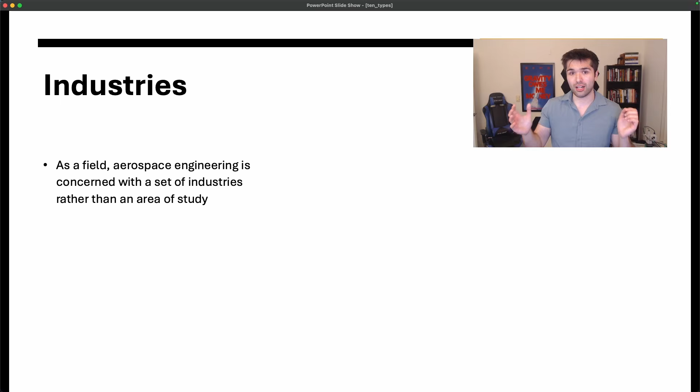So let's jump into the different industries, just to enumerate them all. As a field, aerospace engineering is concerned with a set of industries rather than an area of study. In my experience, and something I heard from my professors pretty early on, aerospace is unique from all the other majors with a couple of exceptions. There are a few engineering majors that don't really have a core knowledge base that everything links back to. Rather, they focus on an industry and then apply fundamentals or entry-level concepts of lots of different knowledge bases to those industries. Aerospace is the prototypical example of that.

So, an obvious one is aeronautics - aircraft, boats. Boats is a big one people don't think about, because boats moving through water is moving through a fluid, aerodynamics, etc. But aeronautics is a huge industry, of course.

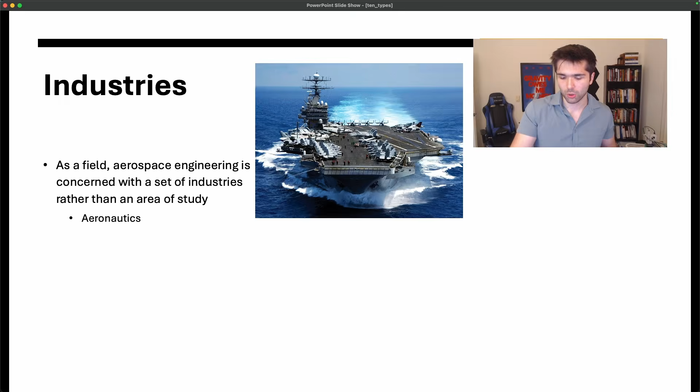Astronautics - satellites, rockets, just like aerospace, that's the space side, obviously an industry unto itself. Aviation - instead of fighter jets and aircraft carriers, just commercial aviation: large passenger jets, cargo jets, large commercial aviation, that's an industry unto itself. And then, of course, no surprise, defense - working on missile systems, drone systems, other types of weapons and munitions, etc.

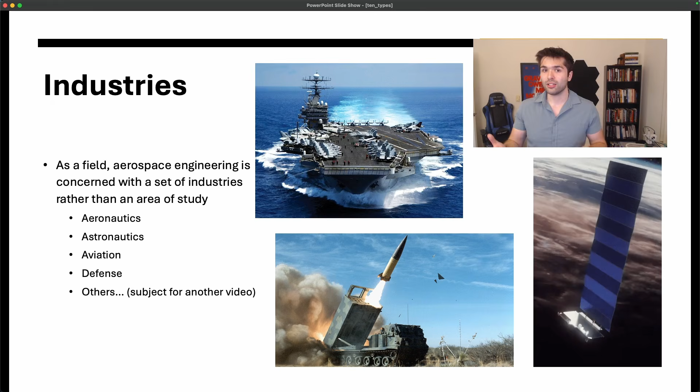So there are lots of different industries in which aerospace engineering can be applied, and these are the ones that come to people's mind, but in my opinion, there are lots of other ones that people don't actually think about that aerospace engineering can be applied to. That's a subject for another video, but overall, when you think aerospace engineering degrees and the kinds of jobs and industries in which people get those jobs, these are the different buckets of industries. I'll go into more detail about it in another video.

Okay, now let's talk about the real reason we're here: the different types of jobs that aerospace engineers can have. So you're starting an aerospace engineering degree. Once you get past some of those gen eds, you're starting to sample different bits and pieces, the different knowledge bases, and you're starting to think about what you want to specialize in.

So the first broad bucket I want to dump people into is what I'm calling dynamicists. Apparently autocorrect says dynamicist isn't a word, but I've heard it used about 10,000 times, so I'm pretty sure it is, but feel free to correct me. Anyway, dynamicists are people concerned with the motion of, or external forces on, a body or a system. Effectively, we're moving stuff according to some laws of physics.

That can be projectile motion, so we launch something that obeys laws of gravity, stuff like that. Rotational motion, so maybe some satellite is spinning or slewing to point at different things. Fluid motion, like through an engine or over a wing, like an airfoil. These are all people focused on effectively physics. These are very important competencies for different types of vehicles, like the way a rocket moves is different from how a drone moves, which is different from how an aircraft moves. Motion is a big deal, and there's lots of people whose job it is to really understand these laws of physics and how they're used in the real world.

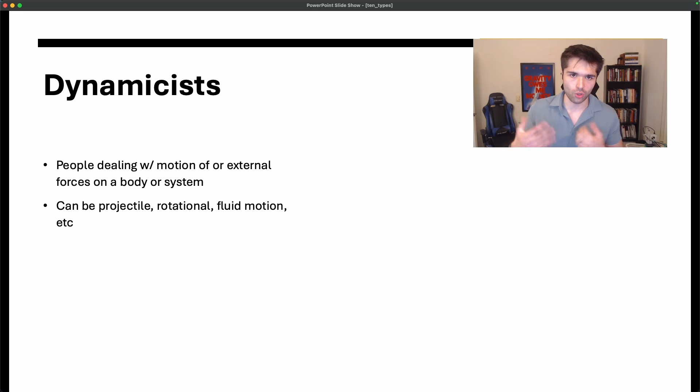So what are some examples? A classic one is aerodynamicists, people concerned with wing design or control surfaces like flaps and rudders, calculating the drag a body might experience and different ways of mitigating that drag. Or maybe, if you're working on something like an F1 car, using that drag to your advantage through stuff like downforce. People concerned with fluid motion, most of the time that's air as far as aerodynamics is concerned, but also maybe you want a boat to require less energy to cross a certain distance, so you need a sleeker hull, less surface friction so the water parts around you more easily. That would be fluid dynamics, but you get the idea.

Now beyond that, let's say you get high enough that air isn't a problem anymore: astrodynamics. Now we're concerned with orbital mechanics, like the two-body problem, where you're just concerned with a satellite orbiting the Earth. You could have a three-body problem, or maybe some crazy lunar transfer, trying to explore the moon or Mars or something else. So that's at the macro level. There's also the micro level, orbital mechanics in terms of relative navigation around other satellites or around a point on the Earth, stuff like that.

And then, kind of getting back to that rotational piece, the orientation at which a satellite is pointed, or the slews between those different orientations, is really important to its operation, for stuff like collecting power with solar panels or communicating with the ground. It's actually an area I've spent a large part of my career focused on. In any case, astrodynamics is the same concept as aerodynamics, except you're concerned with planetary bodies or satellites orbiting around those planetary bodies. I'd also throw rockets in here, though I think propulsion is kind of a separate thing which I'll talk about. Obviously we're launching stuff into space, so you need to get into space to do that - that's astrodynamics.

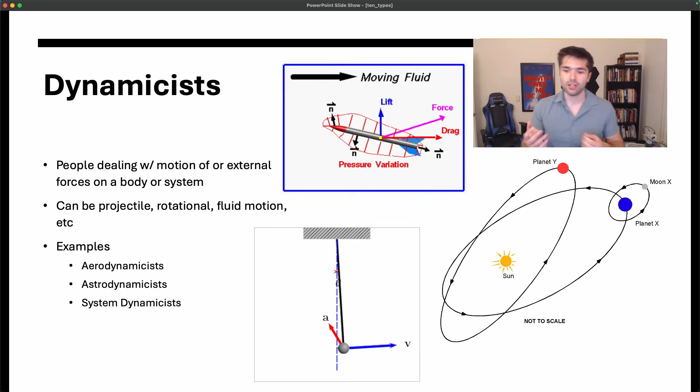Next bucket: structural engineers. At certain schools, like my alma mater, aerospace and mechanical were originally part of the same department before eventually splitting into two. Most students were mechanical engineering students, and aero was kind of a subset of that. This is what you could refer to as aeromechanical engineering. These vehicles are very heavy and very complex, and they're put through really difficult structural conditions during launch and re-entry into the atmosphere, so there's lots of aeromechanical work to be done.

As you'd imagine, these people are primarily concerned with the structural integrity of the vehicle - aka don't die. Don't rip in two, don't have crazy shear forces that break solar panels or rip wings off. Similarly, if you're launching into space, don't shake so hard that you break all the components inside, stuff like that. People who are concerned about the structural integrity of the vehicle.

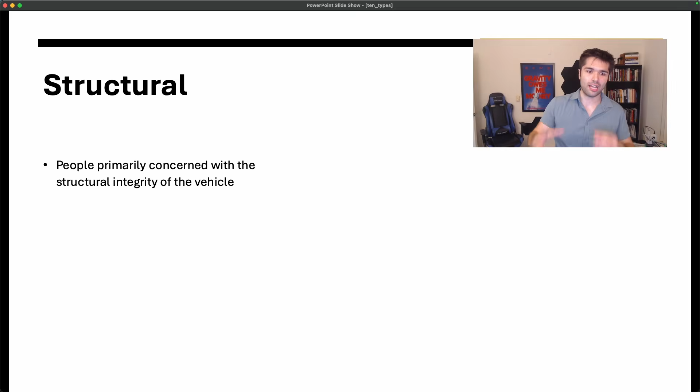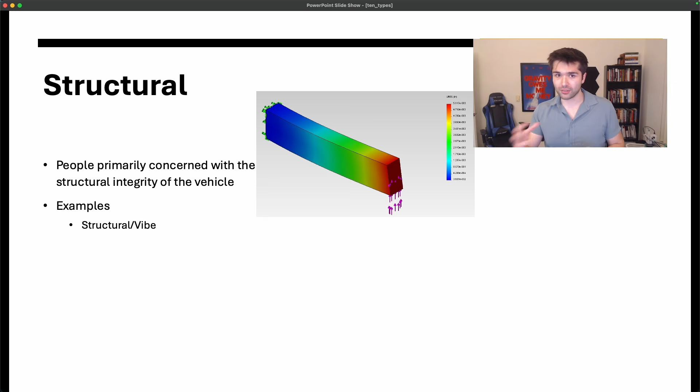Some examples of this are relatively straightforward - just general structural engineering, that's definitely a job unto itself. People who look at different components of the vehicle structure and how they might bend or break or potentially interfere with one another. Similarly, for launching vehicles into space, vibration is a serious concern. Different oscillation frequencies and nodes of that oscillation could potentially break stuff. Honestly, I don't know much about vibration, I just know it's important. But you get the idea.

Beyond that, thermal engineering - people who are concerned with heat transfer. If these things get hot enough, whether due to drag in the atmosphere from the outside or heat from components like computers radiating off, solar panels generate a lot of heat when they're collecting power, and batteries are inefficient so they let off heat too. Whether it's internal components letting off heat or external environmental factors imparting heat on the vehicle, if things get too hot, they start to melt and then they start to break, and that's obviously not what we want. So people make sure that everything's kosher and that the vehicle can withstand the energy being imparted into it - those are thermal engineers.

And then lastly, propulsion. Rocket engines are incredibly complicated. I'm primarily focusing on rocket engines here because a lot of times, if you're working on a propeller plane, the people working on those propellers are more dynamicists, like from the previous example. But rocket engines specifically are a very unique thing because they're what would be called aerothermoelastic structures - stuff gets really hot, which breaks stuff and changes how fluid flows through it, which then makes things really hot and then breaks stuff. They're all coupled - physical coupling is a core principle of designing safe and effective propulsion systems. So propulsion is this black box magic unto itself. A lot of people get advanced degrees in it, master's degrees and PhDs. It's very complicated and very niche, also very cool, and I've heard lucrative as well.

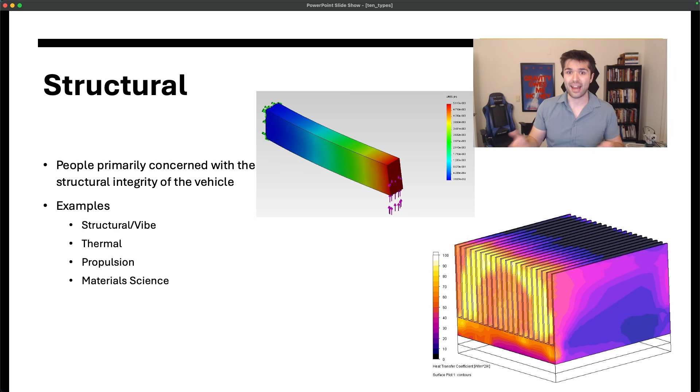Last one here, material science, which is kind of like the mechanical or maybe even chemistry part of how we design these systems. Carbon fiber behaves differently under tension versus compression versus different heat profiles as compared to something like aluminum or mylar or whatever else. The materials themselves all have different properties that have to be accounted for in the design of the vehicle, and these people focus on that aspect of it. So yeah, structural bucket - pretty broad, a lot of cool stuff.

Last piece here I want to talk about is the one I've lived in primarily, which is software. It's straightforward - it's people who write software, duh. In the modern world, the way we design and operate aerospace vehicles, a lot of times we can't do that without software. There's lots of different types of software that people could work on.

An obvious example is flight software. Most aerospace vehicles, be it satellites, aircraft, drones or whatnot, have different compute platforms on them - whether something complicated like a full computer with a carrier board and all the I/O, or something simple like a little microcontroller like a PX4 flight controller, which you may have heard of on FPV drones.

Regardless, the code that runs on the vehicle itself, that's flight software, and the people who write that code are flight software engineers. Lots of really interesting, not only aerospace principles to that, but also traditional CS principles surrounding memory safety and performance optimization, stuff like that.

Really cool field. The next one, guidance, navigation, and control. Obviously, GNC code runs on the aerospace vehicle, but GNC is specifically focused on three functions of the vehicle, which is guidance. So how do I get around the environment in which I'm operating? And if I'm trying to achieve some goal, whether it's get somewhere or see something, how do I do that? That's guidance. Navigation is how do I know where I am, right?

So I'm taking different sensor readings in and I get some loose operating picture of where I'm at, but that's noisy, and there's considerations of how you synthesize different sensor modalities into a fundamental picture of where you are. That's all navigation. And then controls, right?

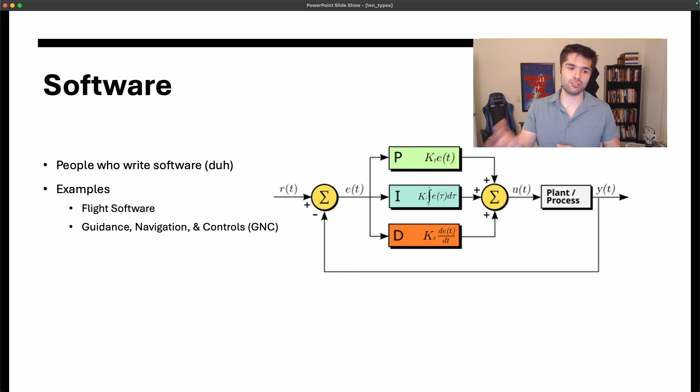So if I know where I am and I know where I'm trying to go, what do I physically need to do to get there, to close that delta? You can see here I have a PID controller as a classic example. What do I need to change about my physical state, whether it's my control surfaces or the thrust I'm letting out, stuff like that, to actually get to where I'm trying to go as determined by my guidance system. So GNC, super broad field, very cool. I've worked in it before a lot.

Avionics then is focused more so on those sensors. Just as an example, satellites have lots of different sensors. Some are optical, some are electromechanical. Similarly, they have different actuators like reaction wheels and thrusters oriented in different ways. Magnetorquers you may have heard of. There's lots of different sensors and actuators on the spacecraft that allow it to do its job and to obey those kind of GNC algorithms we just discussed. Satellites are one example, but they're present on just about every aerospace vehicle, and avionics focuses on those specifically. There's actually a lot of electrical work associated with that.

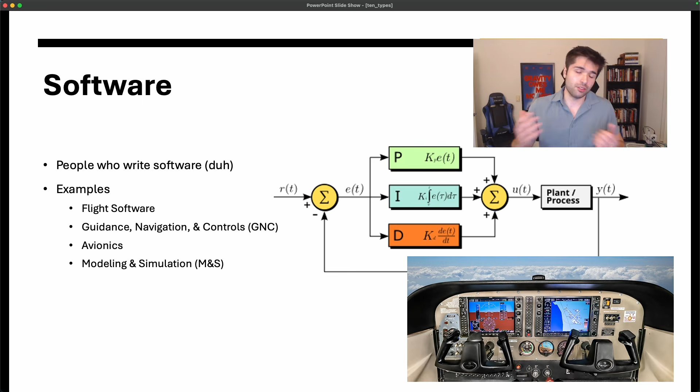And then lastly, modeling and simulation. All these things, we have to simulate how they work, to get a better understanding of whether our requirements are closing, whether our vehicle is behaving the way that we want it to. And so we need a lot of code to model and simulate those things. Now, I'm putting modeling and simulation here. You'll notice a lot of what I talked about previously with structural and with dynamics involves simulation, but modeling and simulation engineers write the code to do that stuff. So in a lot of ways, they're building the tools that enable other aerospace engineers or different types of engineers to do their job. That's what a modeling and simulation engineer does.

It's pretty cool. Last piece here, I want to talk about overlaps between these categories. I'm sure at some point throughout that whole spiel, you were like, wait, doesn't that one belong in that bucket? Like, that doesn't make sense to me. The answer is you're probably right. These are very ambiguously defined buckets, just as I see them in my personal anecdotal experience. But as I'm sure you can understand by now, there's lots of different overlaps and different subsections that you could put in one bucket versus the other. And I want to talk about that.

Okay, so I have a crazy 3-way Venn diagram here to demonstrate these overlaps as I see them. Top left is going to be dynamics, the red one. Bottom is going to be software in blue, and then top right is going to be structural in green. Just as an easy visual way to lay out the different buckets, and more importantly for this part of the video, the overlaps between them. So I want to go around this in counterclockwise order, just to provide some reason to it.

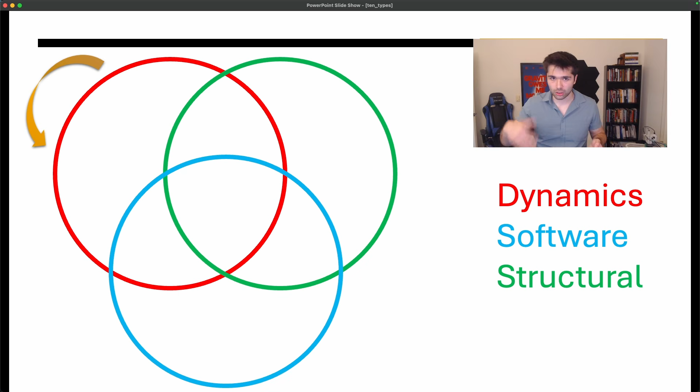So let's start off with dynamics in the top left, right? Aero and astrodynamics, as I said in the very beginning, those are obviously firmly dynamics fields, duh. Beyond that, I would say GNC and mod and sim are kind of fields that involve knowledge of whatever dynamics you're trying to simulate or you're trying to design algorithms to take advantage of. But also there's a strong software component to those, whether you're in GNC and you're writing code that's going to fly, or you're building software tools that other people are going to use. There's a lot of software involved with that, obviously. So that's kind of an overlap between the two that immediately jumps out to me.

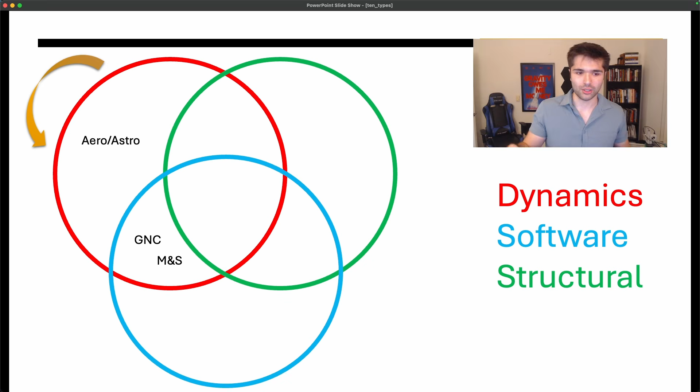In terms of squarely software, I would put avionics and flight software. One thing I'll note is avionics does have an electrical piece to it, so that's not all necessarily writing code. Sometimes that's writing firmware or reading off voltages and verifying that sensors aren't going to fry up in space or in the sky or whatever.

But nonetheless, it's about systems that primarily contribute to the vehicle, either in terms of data—sensors providing data—or based on commands, which are usually software commands, changing the physical conditions of the vehicle. I don't have any overlap here between structural and software.

That makes natural sense to me. One's concerned with the digital world, the other one's with the physical world. Obviously there are certain aspects of software that do overlap, but for the most part, structures are their own thing, and there's a lot of cool stuff within structures, like the vibe stuff we talked about in the beginning, thermals and heat transfer, material science, what you actually construct the vehicle out of, et cetera.

The one thing I will say overlaps is between structural and dynamics, specifically propulsion. Originally I focused on the structural integrity of the rocket itself, whether it's the rocket nozzle or the combustion chamber, or heat coming out of that chamber affecting all the structures of the engine itself. That's what I focused on specifically in terms of propulsion, but also we're trying to get somewhere—so how our propulsion affects the vehicle matters a lot.

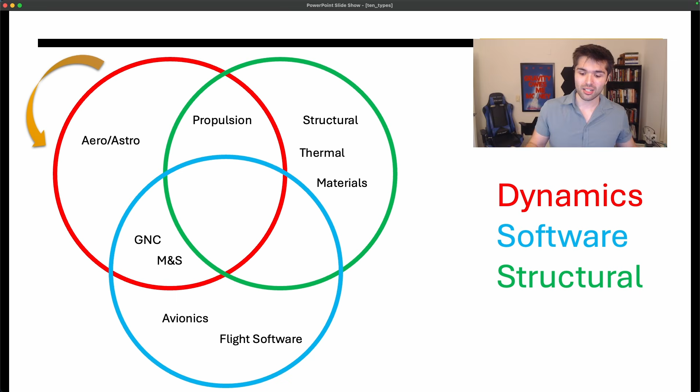And the last thing I want to talk about—I didn't mention this previously—is the thing that uses all of them: testing and systems. Testing engineering jobs and systems engineers themselves can sometimes get a bad rap as just being administrative. But to their credit, and this is as someone who has worked as a systems engineer and conducted tests before, you need to know about just about all of these things, assuming the tests you're doing are vehicle level tests using all these systems.

Which, again, if you're testing the entire vehicle, probably is. Don't sleep on systems engineers—they do know a little bit about a lot of things. For the purposes of designing an aerospace vehicle, coming up with requirements and then tests that validate those requirements, that requires knowledge of just about everything to do with the vehicle, which is pretty cool.

So yeah, this was a bit of a ramble video—I just listed off all the different types of aerospace engineers. But I've seen a lot of buzz around my previous videos on aerospace engineering, and one of the most intimidating things for me when I got started was figuring out what to specialize in. I'm interested in lots of different things, not interested in others. You take a bunch of classes, you drink from the fire hose, and some of it you like, others you won't. At first it wasn't clear how these fields are cordoned off, and if you're trying to maximize your chances of getting a job, maybe you want to focus on one or a couple of them—whatever you really like and feel like you're really good at.

So yeah, I make videos about professional success. I think knowing what you're interested in, focusing on those, and building up those strengths is a really core part of success. I know it has been for me.